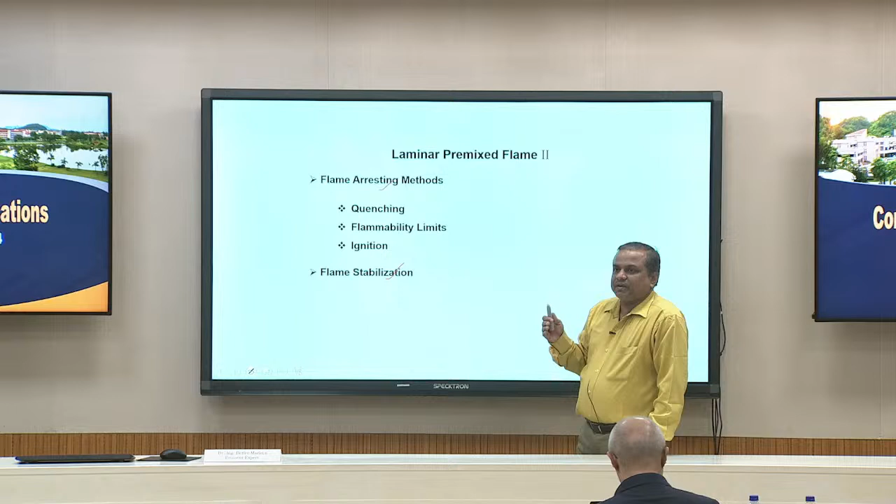In our previous lecture, we emphasized that for a sustainable laminar flame, we need favorable pressure and temperature conditions so that continuous combustion is possible. We demonstrated this with respect to IC engine combustion for premixed air-fuel mixture, where for normal combustion we get a pressure trend as a function of time in a smooth manner. But when the favorable condition is not there, this is shown as pressure pulses, sudden oscillations when the peak pressure is reached.

This says that the flame is already at elevated pressure and temperature and has sufficient strength, and it provides knocking.

At the same time, if you want to bring this situation back, we need other methods to avoid this knock through certain mechanisms in which flame can be arrested. Of course, this flame arresting is not a typical phenomenon for engines,

but this arresting method is very much required when you use laminar flame for certain applications such as burners, cooking burners. This arresting method is required so that the flame should not travel back or create a flashback, for which we require to arrest the flame. In other words, we must reduce its momentum to move backward. So that is one aspect we also require.

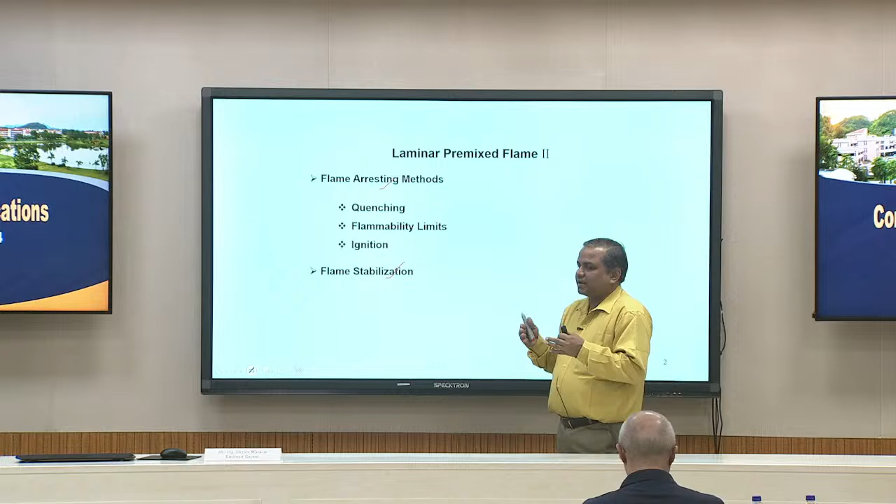Second aspect is that for cooking type burner applications, we require a continuous stabilized flame. As long as we are supplying air and fuel mixture with appropriate compositions, we must get the flame. And the flame should sit on the burner surface - it should not blow off, meaning it should not go above the burner, but at the same time it should not create any flashback. So that condition we call flame stabilization.

So there are certain techniques this flame arresting method is dependent on. First method is that we should know what are the different criteria in which we generate the flame. In the SI engine case, the flame is propagating and you need to arrest it. So the arresting of the flame depends on the area in which this flame is moving.

Second method is that we can control flame propagation by changing the composition of the unburned fuel-air mixture. We can talk about this in the form of flammability limit. The first one we can talk about in terms of geometry in which the flame is propagating, which can be quantified by quenching distance.

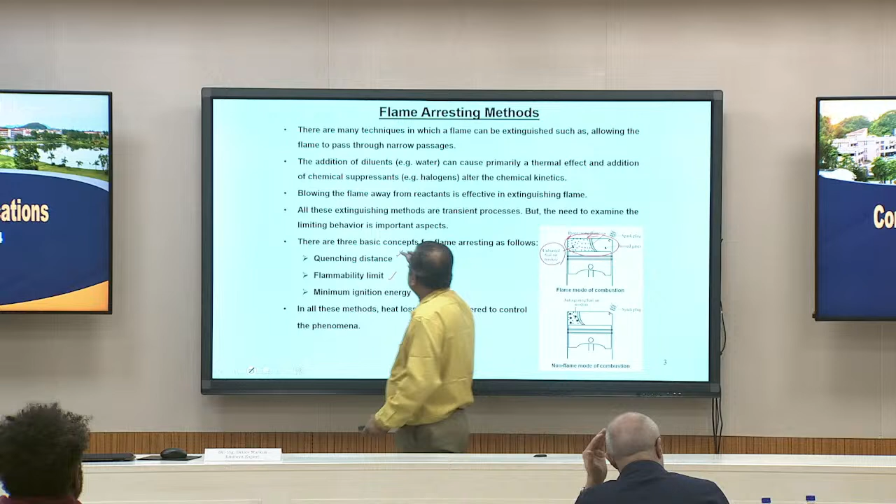So these are some of the methods we can think of. Second, in a classical way, we try to extinguish the flame. The extinguish method is simply dumping or cooling the flame through water - when fire is burning we dump water so it gets extinguished. In some cases we have fire extinguishers that can stop flame propagation.

This means diluents such as water, chemical compositions, or fire extinguishers in the form of halogens can alter the chemical kinetics. So basically, in totality, the flame has to be extinguished under certain situations so that it cannot create explosions.

In a layman sense, we can say by creating these concepts we are altering the chemical kinetics of the flame. So, these are the three basic methods which we are going to discuss.

So first, let's talk about a term called quenching. This quenching term depends on a parameter called quenching distance.

This quenching distance is determined by observing the flame passing through a tube, so that it does not flash back for a particular tube diameter. This means looking at a flame passing between two parallel walls separated by a distance d, and observing the flame in this domain.

So what you can see: there are two walls here, and we can imagine there is a flame moving up. This dotted line shows a kind of wall in the vicinity of the flame, which we call an adiabatic wall, and this slot has total energy entirely stored in the flame as it moves up. So when it is going up, it is trying to bring the charge into it and get it combusted, so that it moves slowly.

So there are two parameters here. One is called delta, and the other is the parallel wall distance in which the flame is moving. So there is a correlation between this delta and D.

So once you put this minimum ignition energy, the heat liberated by these chemical reactions must be equal to the heat loss from this slab by thermal conduction. So basically, the heat generated is getting taken out by the slab in which it is moving, that is, the wall.

When you imagine this type of flame propagating in a combustion chamber in engines, the chamber gets heated and requires cooling. So in this perspective, the heat generated is getting consumed. Now if it has to be consumed, that means if it does not, the strength goes up, and if it does not get consumed it will create a flashback.

So in this philosophy, there are two parameters taken into account. One is a flame which has entered a slot separated by a distance d, and we can define an adiabatic flame thickness delta.

Adiabatic flame thickness delta means the flame is not getting cooled, and the entire energy is sitting within a certain vicinity of this wall, within some vicinity of this thickness, and that thickness is very short, called the flame thickness. At this point, the flame has its maximum strength of heat within that volume, and this has to be distinguished or extinguished.

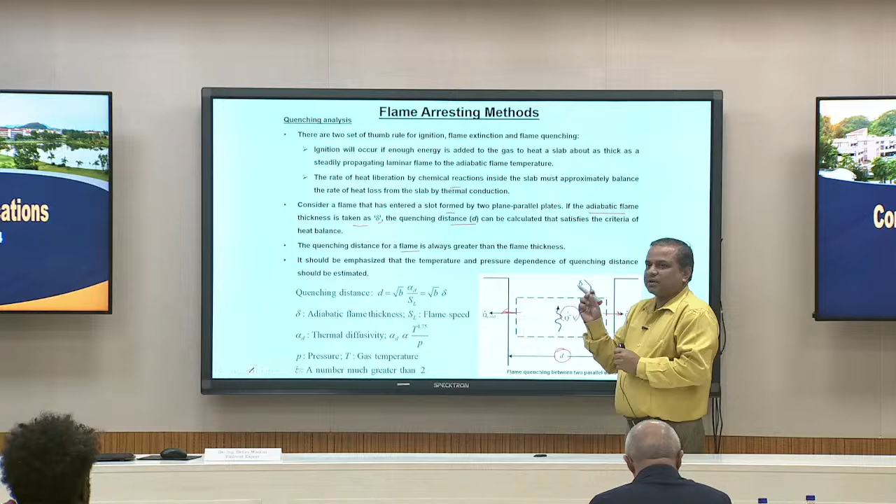That means this distance should not be so small with respect to the flame thickness; it should be higher than that. And this flame quenching distance is also dependent on other parameters like pressure and temperature.

Over the years, things are modeled to find suitable correlations between this quenching distance d and the adiabatic flame thickness delta. And here we define two parameters: one is delta, the other is b, which stands for the square root of b, and we have the square root of b into delta.

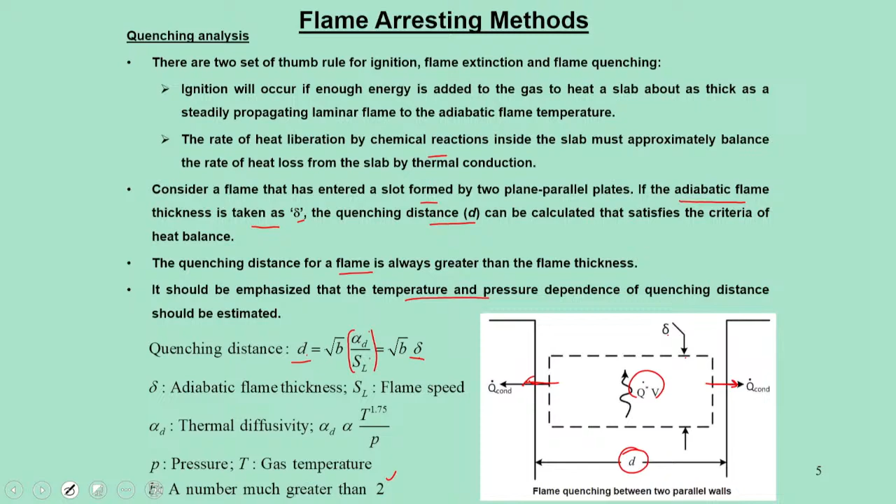Delta is equal to the ratio between the thermal diffusivity and the flame speed. B is just a number, used to make a correlation such that the quenching distance and delta get adjusted among themselves. Further, this thermal diffusivity is dependent on pressure and temperature parameters, and it is proportional to T to the power 1.75 divided by P.

The next point we talk about in terms of flame arresting method is the flammability limit. For every fuel there are two limits within which we can initiate combustion.

You must have known that for IC engine operations, we define this in terms of equivalence ratio. That means the engine normally operates in the equivalence ratio between 0.8 to 1.2, that is the part which is effective from the engine point of view.

But with respect to the fuel point of view, it is also possible to initiate combustion at a much lower equivalence ratio, less than 0.8, and it can also go above 1.2. What we are looking at are the flammability limits, the minimum limit for the lean mixture and the maximum limit for the rich mixture.

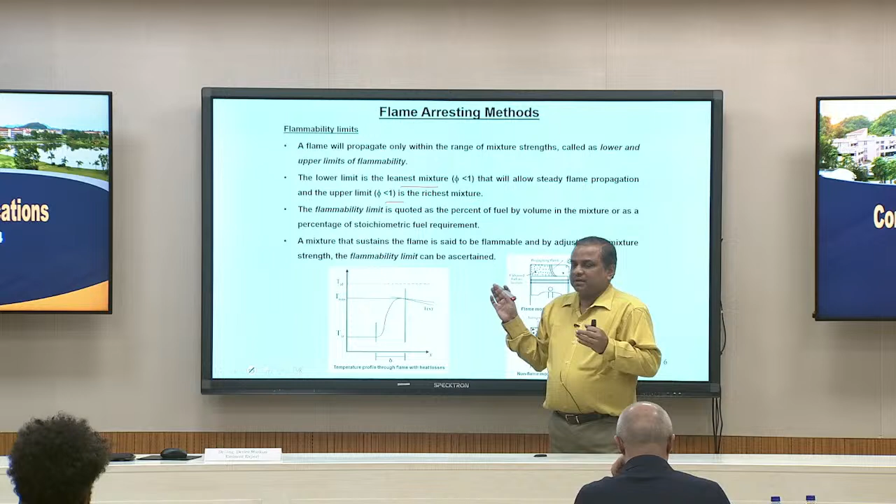We say that above this mixture we cannot make it too fuel rich, so combustion cannot be initiated, and we cannot have a mixture too lean for which combustion cannot be initiated. So that is the limit we call the flammability limit.

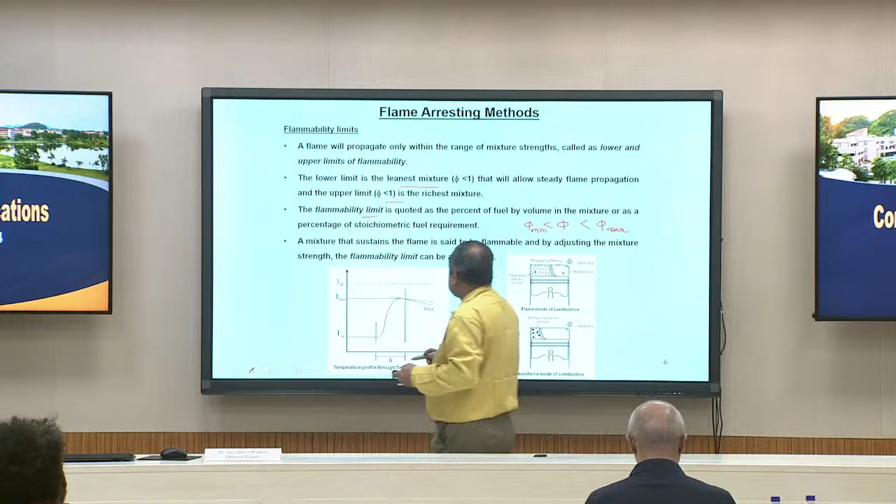This particular curve talks about the flame temperature as a function of x, and we are also looking at delta, the flame thickness. Here, when combustion is initiated, temperature shoots up suddenly to a maximum value, and in this impulsive nature of temperature rise, we define the adiabatic flame thickness, where the temperature reaches a maximum.

However, we can have an adiabatic flame temperature which is much above that. When we talk about the flammability limit, we have to say that somewhere we are operating at phi, with phi minimum on this side and phi maximum on that side.

Another important point to notice is that there is an instantaneous axial temperature rise along the centerline of the tube. There could be possible conduction losses along the wall, and many times the cooling effect of the product gases creates an adverse situation.

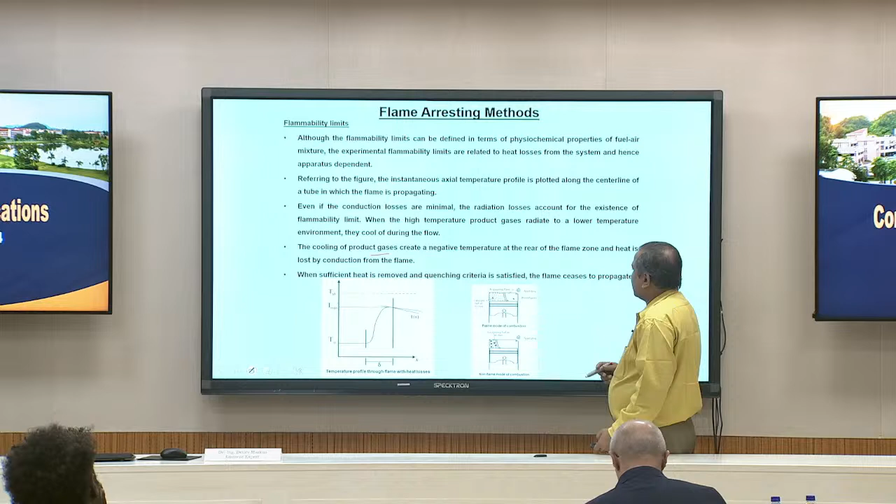Now, when sufficient heat is removed and the quenching criteria is satisfied, the flame does not move further, so the flame stops there. That means the flame is sufficiently cooled - in other words, we say we have arrested the flame.

The next category of analysis for flame arresting method is ignition. Ignition normally happens using a spark plug. The spark plug has certain dimensions, certain size or diameter, and during spark ignition what happens is we are creating a kind of...

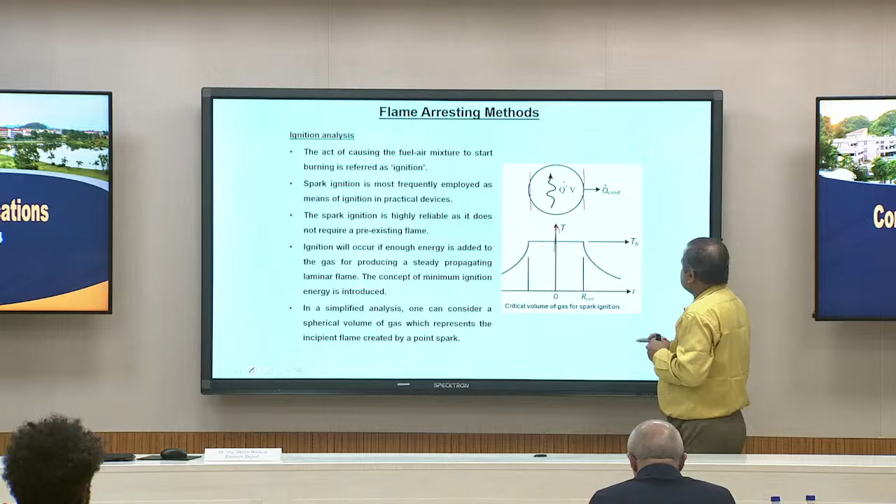One simplest way we can create is a spherical flame. We are dumping energy through the spark plug, which has some diameter, and through this spark plug whatever maximum size we can create - a spherical flame based on its critical radius - that is the maximum diameter of the spherical flame this spark plug can create. This is called the critical radius of the plug, or from the flame point of view, the maximum diameter of that spherical flame.

There are some correlations that help us find the critical radius of this gas volume. This is modeled in terms of spherical flame, and it depends on what we want to know: the minimum ignition energy required by the plug. To get this, we require the information about this critical radius for the gas volume, and this correlation says that the critical radius is square root of 6 into alpha D by SL.

Here, alpha D depends on many parameters, including the pressure parameter. This SL depends on the ratio of unburned gas mixture and burnt gas mixture. We have other terms which can be interpreted in terms of flame thickness, because alpha D by SL is delta. Through this we can find the critical radius for a gas volume as a flame thickness of this spherical layer of gas.

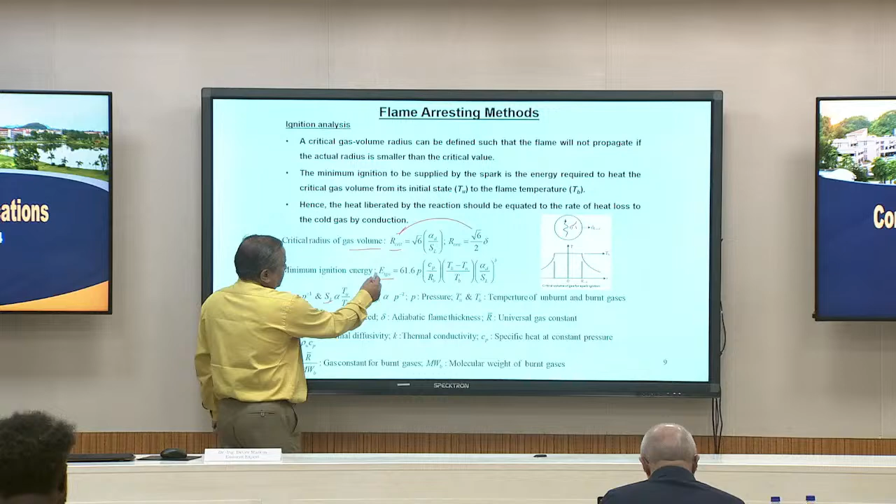Then we need to find the relation through which we can determine how much minimum ignition energy is required for a self sustained moving flame. That depends on pressure, thermal diffusivity, flame speed, temperature ratios and so on. Here RB stands as the gas constant. This is one parameter like Cp by Rb, where Cp is the specific heat at constant pressure and Rb is the gas constant for the burnt gas. This is calculated through ideal gas relations.

Next we need to talk about this ignition analysis. As already mentioned, the effect of pressure on the minimum ignition energy is the result of direct influence and indirect influence in terms of thermal diffusivity and flame speed. So we can say this minimum ignition energy is inversely related to the square of pressure.

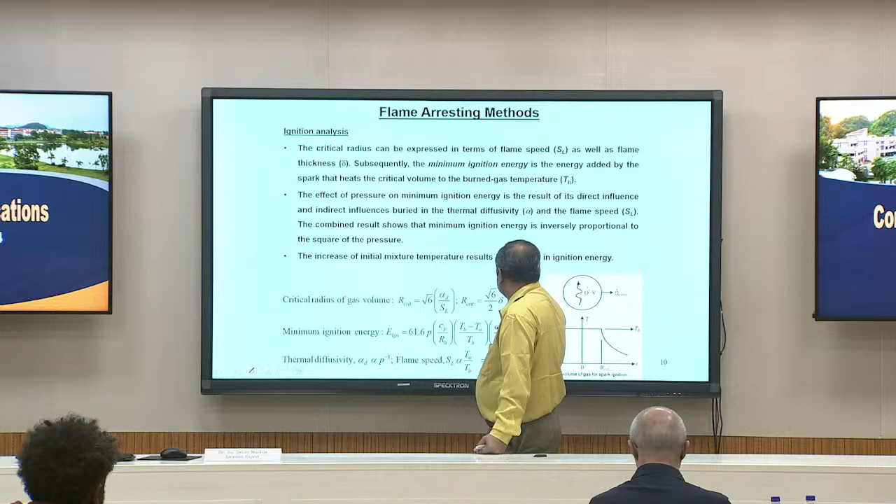If you see here, minimum ignition energy is a function of pressure, but pressure is implicitly involved in the calculation of flame speed. How? Because flame speed is a function of Tu by Tb, which means it also boils down to ignition energy being inversely related to pressure.

Then we move on to the next segment, called flame stabilization. In most combustion analysis, particularly cooking stoves and similar applications, we require a self sustained flame to remain, so that the flame is sitting on the burner face. There are two phenomena that can occur if the flame is not stabilized: first is called flashback, second is flame lift off. These are the two critical aspects for flat burners or cooking burners.

Flashback can occur when the flame enters and propagates through the burner without quenching. That means the flame does not see sufficient pressure difference to move forward, so it travels backward. While traveling backward, it sees that it does not have a sufficient slot diameter, and it follows through that slot in an effective manner. Through this we get a flashback. For that reason, an appropriate quenching distance is not maintained, and that condition is called flashback.

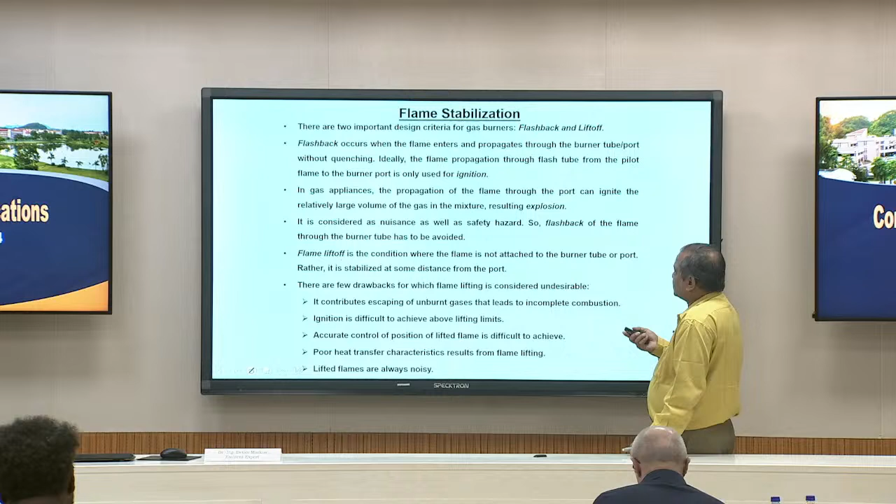However, this lift off condition has to be avoided, because that is not a case for flame stabilization. Why? Because this lift off situation allows the unburned gases to escape, meaning we are underutilizing our charge. Although the flame can lift up to a certain distance, if it goes above that it is difficult to create ignition. That means ignition is difficult to achieve above the lifting limit. Then accurate control of the position of a lifted flame is difficult to achieve. Through this lifted flame, we end up with poor heat transfer characteristics. And when we have lifted flames, they are always noisy.

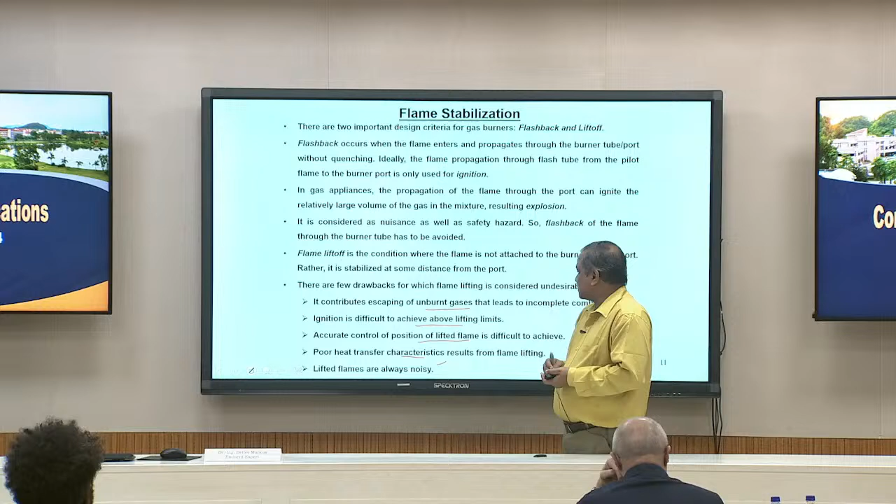In conventional cooking burners, you might have experienced these cases when the flame lifts off, or when we suddenly switch off the burner and an abrupt noise pops up, which means those cases are recalled as noisy situations.

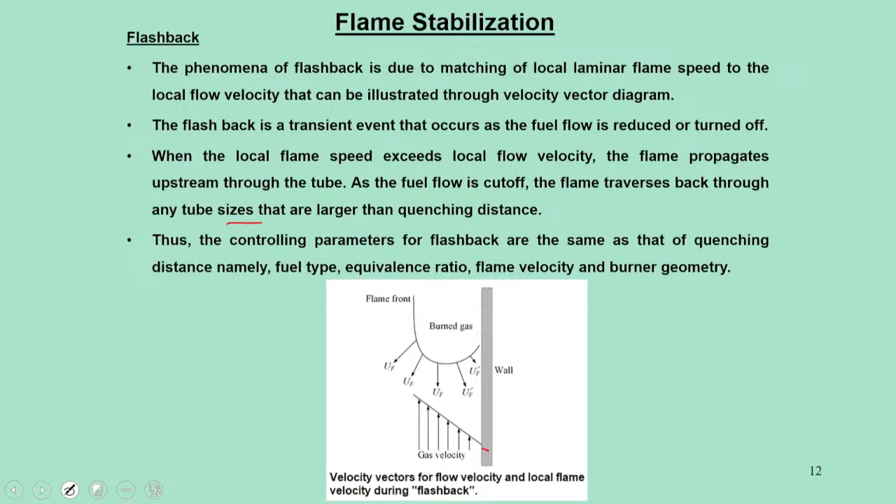It also depends on the tube size in which the flame is propagating. So the controlling parameters for flashback are the same as those for quenching distance, namely fuel type, equivalence ratio, flame velocity, burner geometry, and so on.

This is another figure which talks about a case study, just to give some trend comparing two types of fuels: one is a fossil fuel, methane, and the second is hydrogen. The basic difference between these two cases is that hydrogen has a large flammability limit, whereas methane has a smaller flammability limit. This means in terms of equivalence ratio, there is a large window in which we can create ignition for hydrogen, but a small window for methane in terms of phi, the equivalence ratio. Because of this, the flame speed in hydrogen is about 5 times faster than the flame speed of methane.

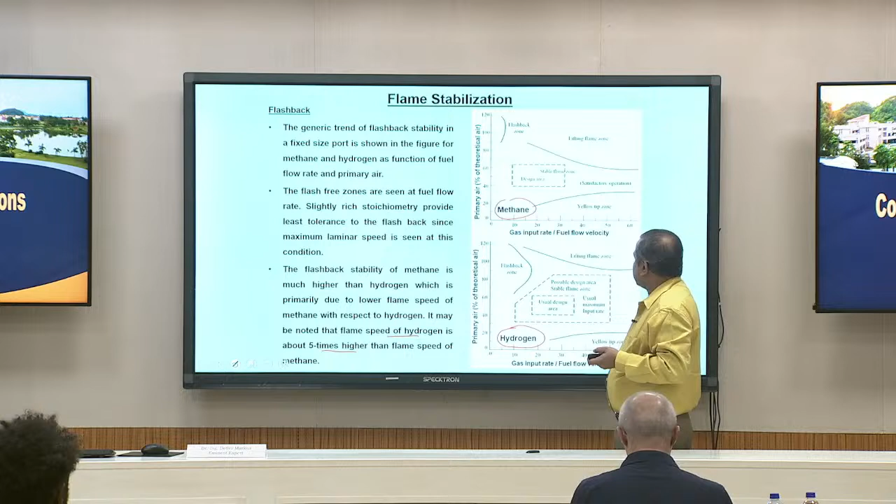So what this particular diagram shows is a generic plot, not in a quantitative manner. It talks about the gas input rate or fuel flow velocity with respect to primary air, and with respect to the percentage of theoretical air we consume.

If you look at the trends, for methane we have a flashback zone somewhere here, meaning for flashback to occur, our air requirement is very high, but fuel requirement is very low. That is the safe zone in which fossil fuels are operated, but that is not true for hydrogen, because the flashback zone can happen at any point with very small fuel flow input. At the same time, air requirement may be close to 60%, and air is anyway available for the charge. So a small quantity of fuel can lead to a flashback zone area. This is not possible when we use methane.

Now, when we say the flame is getting lifted from the burner surface, we can find a trace showing that if you keep increasing the gas input rate or fuel velocity rate, you will find that with increase in the fuel flow rate, the theoretical air requirement is less. This number is somewhere within 60%, whereas for hydrogen it is much higher.

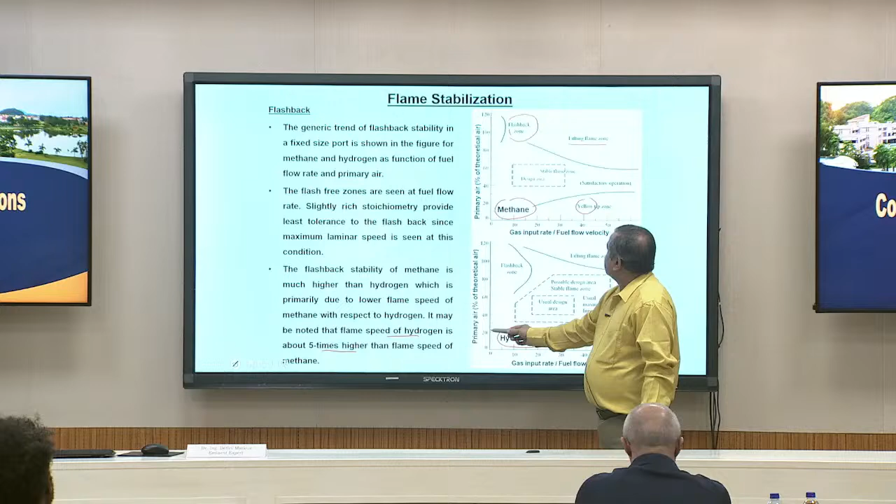Similarly, we have a lower regime in which the flame shows a different color, like yellow here and yellow here, and this is possible at 20% and also close to 40%. This gives us a domain in which we can design the geometrical area of the burner port. Here we have a large domain of design area for a stable flame, because that is what we require, and that is a standard domain. For hydrogen, we will also have a stable flame in a much larger domain than this.

That means for hydrogen the lifting zone requirement is higher, whereas for methane it is lower, which means we have flexibility of a larger burner area for hydrogen compared to fossil fuel or methane. So this is one kind of advantage, but the maximum possible area for hydrogen can be defined here, though there are detrimental effects if the flashback zone is taken into account.

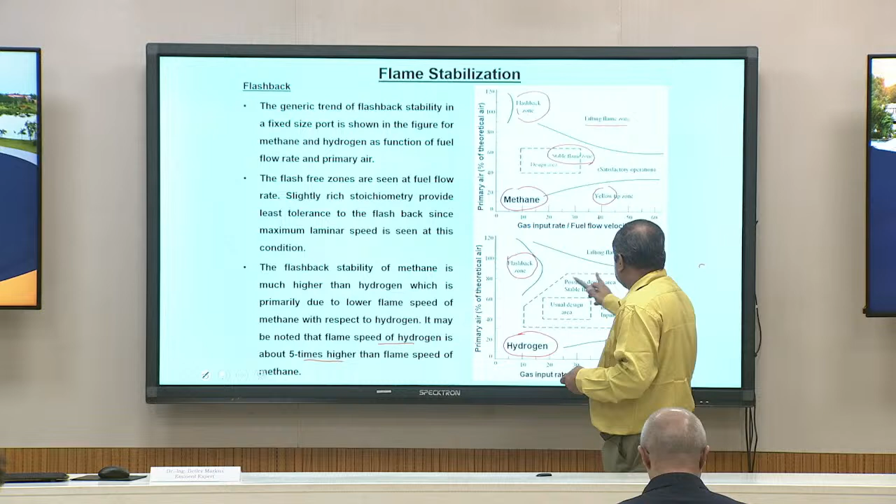In general, the basic summary is that whatever size or design area you choose for a stable flame, either for methane or hydrogen, the main intention is that it should have a flashback-free zone during its operation. That is the requirement for a stable flame.

Another situation I have emphasized is that the flame tends to lift up. It gets lifted up because the flame does not get enough oxygen from the charge, and it gets oxygen from the diffusing air outside the zone, which is the atmosphere. Assume we have the burner face and the flame gets lifted up, so there is a stand-off distance between them, through which atmospheric air runs in and oxygen gets filled up.

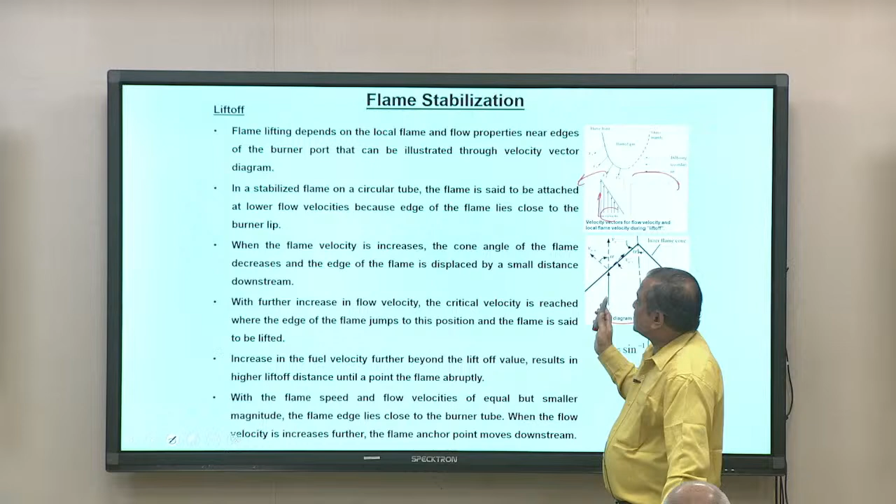So the flame front gets enough oxygen to lift further, but while lifting further, at the same time the gas velocity is coming up, so they either try to diffuse or interact. If the flame front lifts beyond a certain limit, the input charge can diffuse outside without getting ignited, because the flame front has already traveled further and the energy is no longer in the vicinity of the surface. In terms of the velocity diagram of laminar flame, alpha changes, so alpha no longer satisfies the condition between unburnt gas velocity Vu and the laminar flame velocity SL. They do not match, which means the flame gets lifted up.

So there is a critical velocity at which the flame gets lifted up, and when it crosses this critical velocity, we get a higher vertical flame lift-up distance, with the flame sitting above the burner surface.

This I have already explained, but I need to emphasize the phenomena of lift-up versus blow-off. Lift-up means the flame is getting lifted from the burner and sitting somewhere above it.

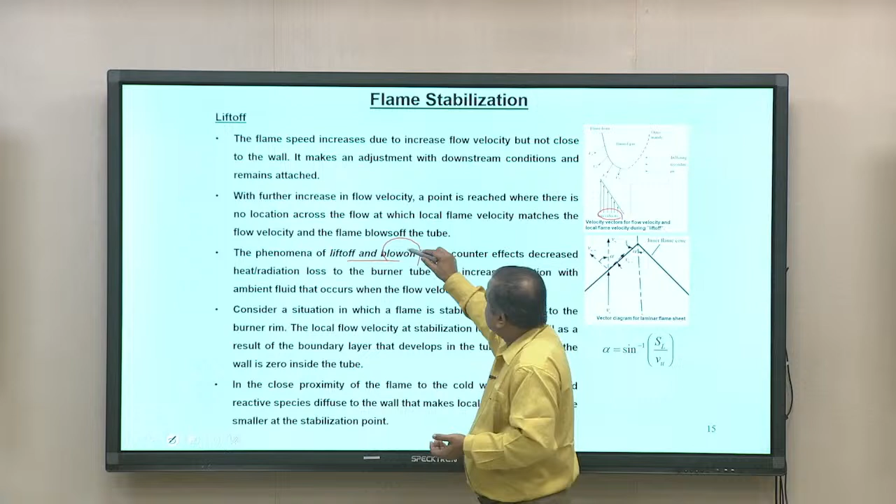There is a situation called blowoff. Blowoff means that at one particular time, the gas velocity does not see the flame in its vicinity, meaning the input charge velocity does not see it and so it cannot be ignited. When it does not get ignited but has sufficient momentum, it can push the flame, but it cannot ignite on its own. That way we say the flame blowoff condition is achieved.

Now, from a heat transfer point of view, we say this is a counter effect due to heat or radiation loss to the burner tube. So this view analyzes the heat or radiation loss.

Ultimately this leads to the conclusion that for methane and hydrogen, the liftoff operation of the flame varies as a function of primary air flow velocity, and the methane flame is more prone to lifting compared to hydrogen. That is also true because hydrogen has a very high, wide range of flammability limit, and of course hydrogen has a higher flame speed.

So this is all I need to discuss with respect to the laminar flame analysis. At the end of this lecture I will emphasize some numerical problems highlighting a flat flame sitting on a burner, which we need to calculate, and one case study done for a methane-air mixture, with the condition that the burner operates at 310 Kelvin and 6 atmosphere.

We need to find the condition for flashback and the mixture mass flow rate, meaning we need to design this burner. When designing it, we are trying to find the burner size and so on. First we need to find, for the methane-air mixture, the mass fraction of air and the mass fraction of fuel, and also the density of the unburnt gas mixture to obtain the mass flux.

Using these equations, either the dependence of flame speed as a function of pressure can be used, and from this one can find these things one by one: first the mass flux, second how we can find the diameter ratio, which addresses the conditions for a non-lifting case, and other cases such as when the flame has to sit on the burner surface, and what is the maximum distance it can sit at.

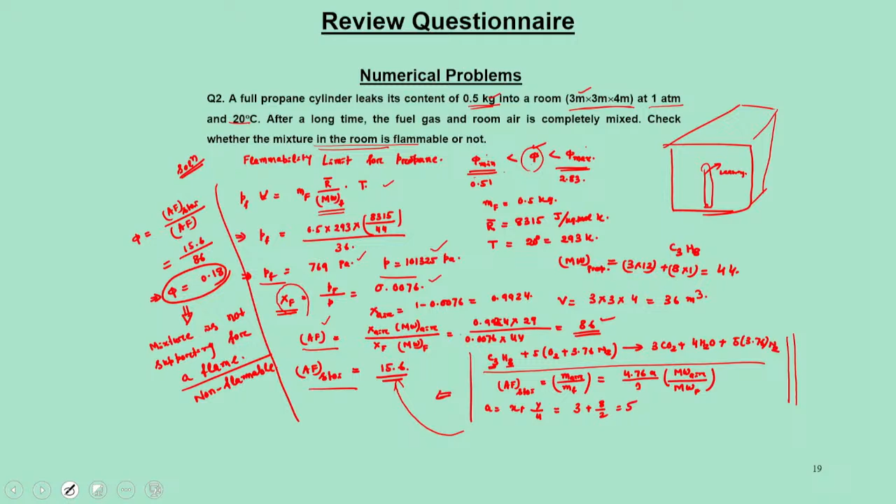From this we can find out what is the equivalence ratio for this fuel which is getting leaked. This mixture, when it is leaking, is mixing with air, and in that case the equivalence ratio is 0.18.

Then you have to cross check whether it falls in that flammability limit or not. In this particular case the mixture does not support the flame, so this leaking cannot initiate a flame. When it cannot initiate a flame, we can say it is not a detrimental or adverse effect, and it does not lead to any kind of explosion.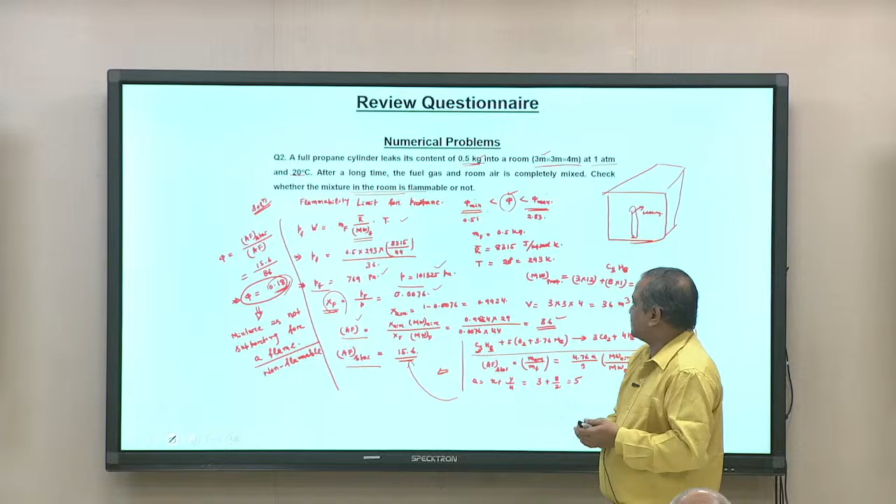Sometimes also in our conventional cooking burners, we feel there is a leak through smelling, but that leak does not lead to explosion because it is in a very low flammability limit. When it crosses this and comes to the higher flammability limit, it can create some adverse situations. So this is all I need to discuss for today.

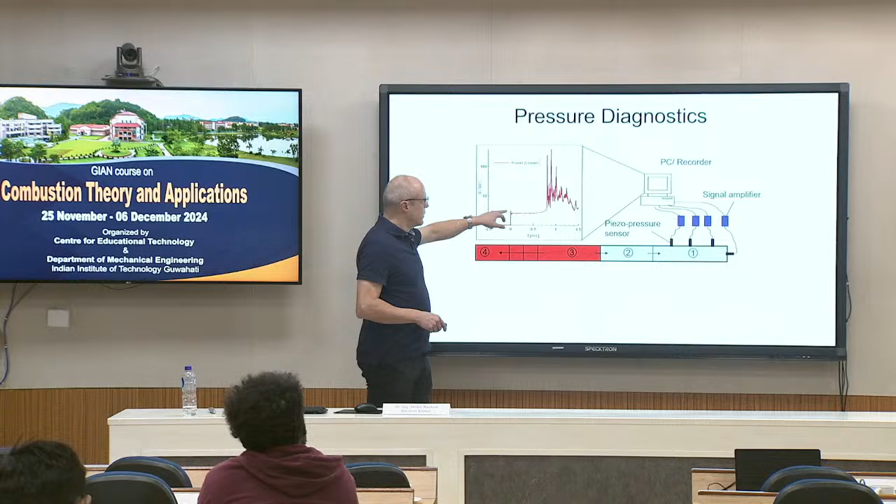We have seen this yesterday already in a shock tube. You can of course use a pressure sensor to examine the process and get your specific signals. If you use several pressure sensors along the pipe, you can measure velocity, and at the end wall, for example, when you reach the T5 zone, after a given delay time, you can measure the ignition delay time.

This we can support with emission spectroscopy if we have a proper window applied to our investigation volume. So here we have the emission of OH star, for example, which is then detected by a photomultiplier and stored by a PC recorder. The emission also gives us information about the ignition delay time, which is often a better variable to examine your results with numerical calculations.

So hopefully today this video will work. So we can perform Schlieren measurements. So you see... we don't see. I'm sorry, I've tried it on my computer. I have reintegrated the video. Okay, we can live without it.

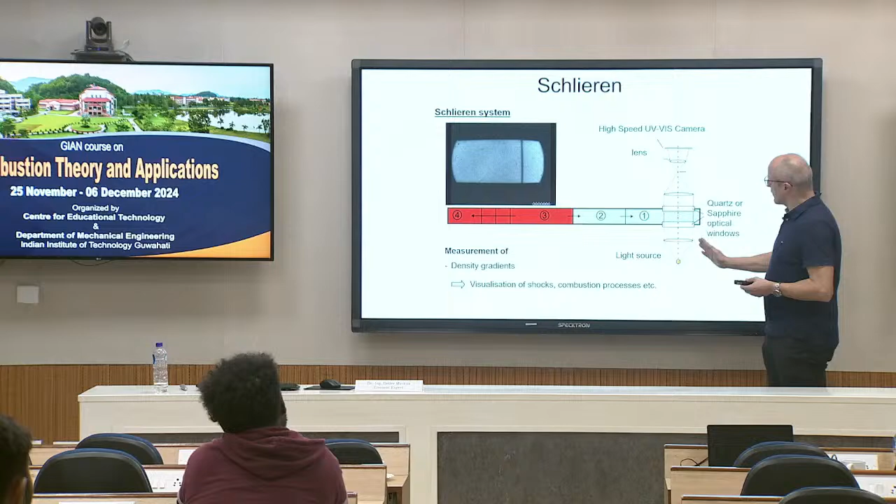What we have here is a typical setup: a light source, a typical lens, and then another lens to collect the light. Here we have a knife edge, for example. The idea is, if the light is not disturbed, we won't see any influence. But if we have hotter or colder zones, our light is deflected, so it's no longer in line, and some part of the light moves to the side and is cut out with our knife edge. So in our image we would see a darker area, or the other way around, if it moves the other way, we would see a brighter area.

So we see density gradients and can visualize shocks and combustion processes this way. It's also possible to perform quantitative Schlieren measurements, so if you do it very precisely, you can also get information about the temperature field.

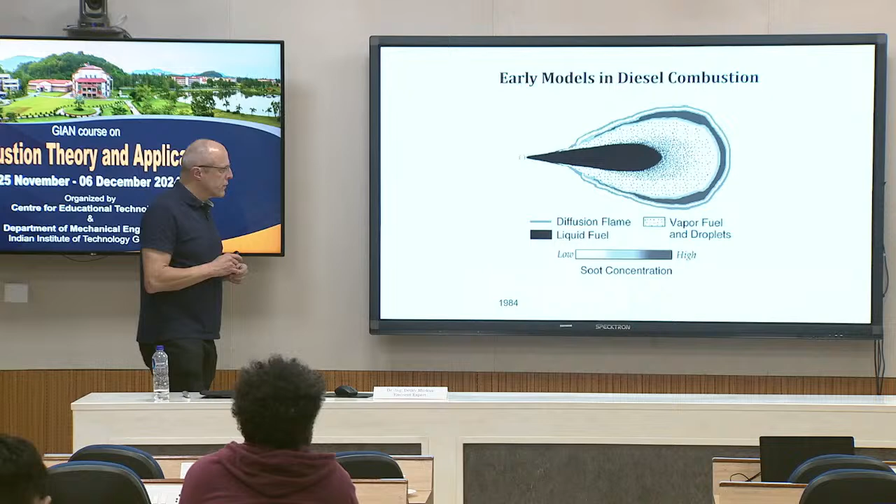Here's an example: an early model for diesel combustion. Until 1984, it was assumed we have a jet of liquid fuel, which vaporizes and atomizes, and then we have a diffusion flame in this area. So here we have the diesel, here the air, and the flame takes place in this area.

So then here we perform Schlieren measurements in an optical engine. We have one cylinder of an engine with optical access through a small window. At the bottom of the piston there is a mirror, another window here, so the light is transmitted to the outside again and collected with our camera here.

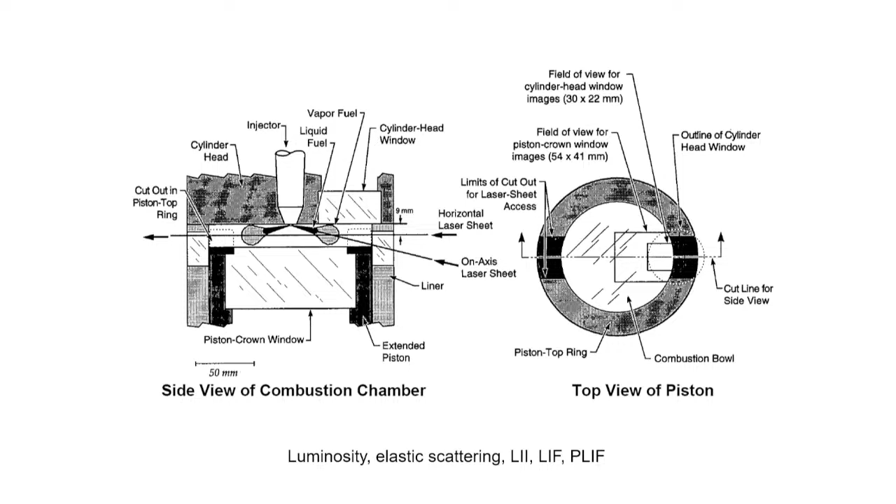Here you can see more in detail the setup. The light is following this path here, and so we have possibilities to examine our diesel process.

These techniques then have shown finally that the classical model was wrong. We don't have a classical diffusion flame outside; instead we have a fuel-rich premixed reaction zone, and combustion takes place more or less all over here. The NOx formation and the soot formation, soot oxidation zone are outside.

So what is the ideal solution? What would be the dream? It would be nice if we could measure the interesting species time resolved, including radicals, transient intermediates, and even isomers, and this should be done for all interesting pressures and temperatures.

So what can we do already? That's already a lot. Here you see a classical reaction pathway. On the left and on the right you see the soot formation process, starting with simple hydrocarbons plus oxygen.

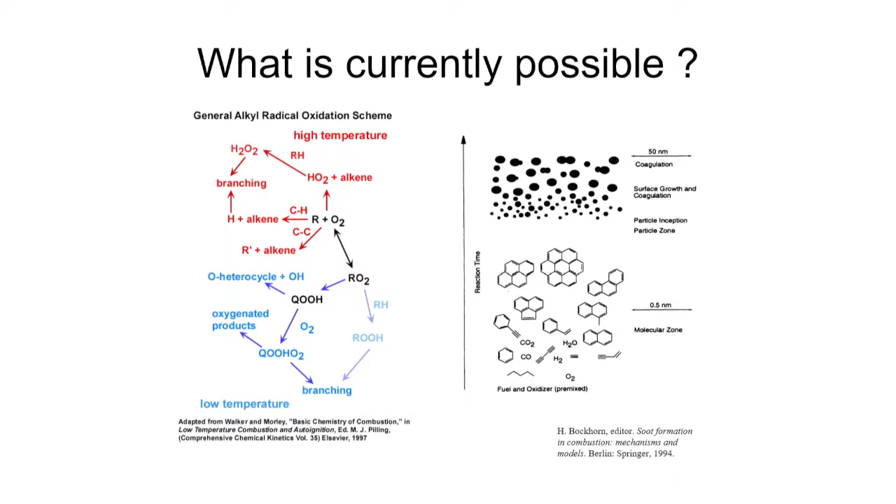So here we can use absorption, fluorescence, emission, phosphorescence, chemiluminescence, LIF (laser-induced fluorescence) to examine the molecular level. Then we can use LIF for the larger PAH, and finally we have LII, laser-induced incandescence.

And Mie scattering to examine the larger soot molecules. I will explain all the background here in the following slides. And here, of course, this we have already discussed. We have the possibility to examine our interesting molecules, HO2, H2O2, H, RH, OH, RO2. So we have specific tools here to examine the temporal evolution during elementary reactions, but also during the overall combustion process.

Of course, there are limitations. First of all, we need optical access. That's important. For example, consider Rayleigh scattering - the scattering of our laser light by the molecules in our volume. Rayleigh scattering means the detected wavelength is the same as the excitation wavelength. The idea is the detected scattered light comes only from the molecules along the pathway of the laser.

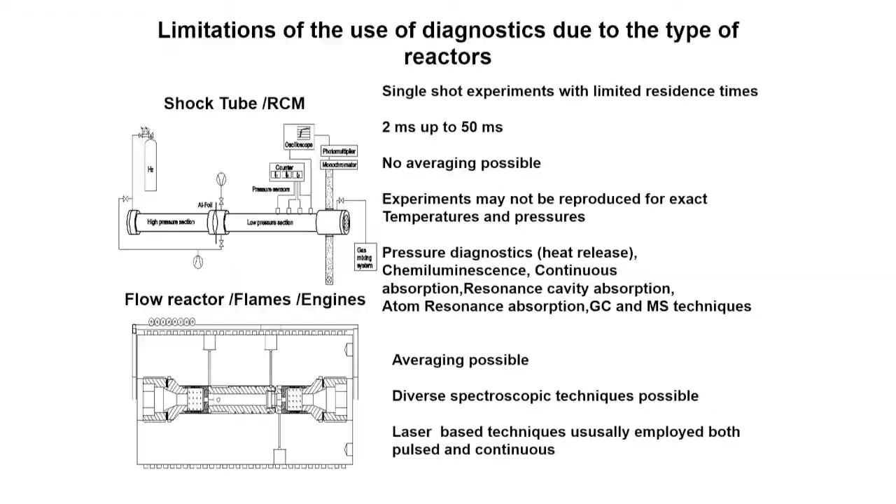So what we discussed yesterday with this shock tube - yes, we can have optical access here. We have quite long observation time, so 2 milliseconds up to 50 milliseconds. However, in this shock tube we have not the possibility of averaging. So we have one shot, and then after 30 minutes we can perform the next experiment.

And then, of course, the question of reproducibility. Even though it may be reproducible with one specific setup, if you then want to compare it with another setup in another lab, there may be deviations we have to consider. But then we can use the whole range of techniques here for this.

So we have discussed it shortly also for the flow reactor, where we have access, so we can use laser-based diagnostics also inside a flow reactor. Of course we have to adjust our setup to have access here, but it's very, very often possible, even though we have to use closed vessel systems.

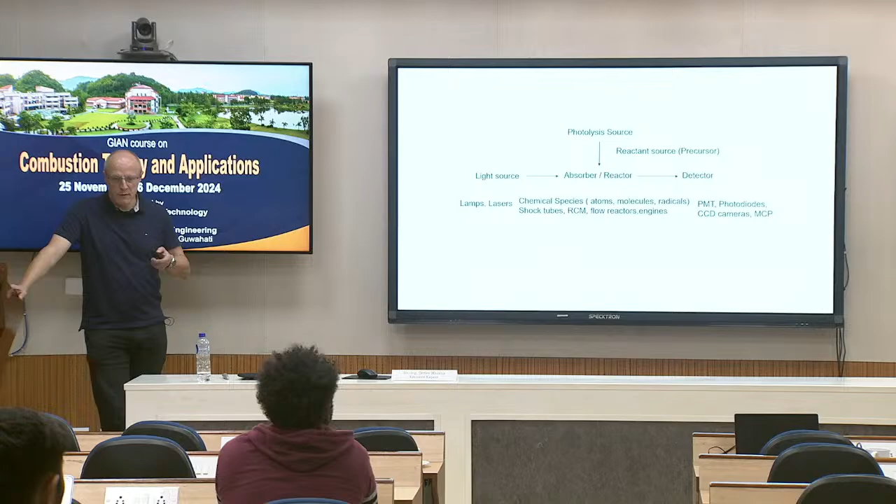So the need here is, of course, we need to have a reactor - our shock tube, RCM, flow reactor, engine, whatever. We need something we want to examine, and which we can examine using proper laser technique. LIF, for example, is only possible with selected species.

So OH and NO, nitric monoxide, can be used easily. CH is also possible, but if we want to use LIF for H and O atoms, it's getting more and more complicated - two-photon techniques have to be used. So we need, for the proper species, first of all a proper species, and then of course we need a proper light source.

Lasers are quite expensive. We are talking about several hundred thousand euros for a very sophisticated setup. So of course this is then the crucial part. You can do whatever you want, but you have to pay for it.

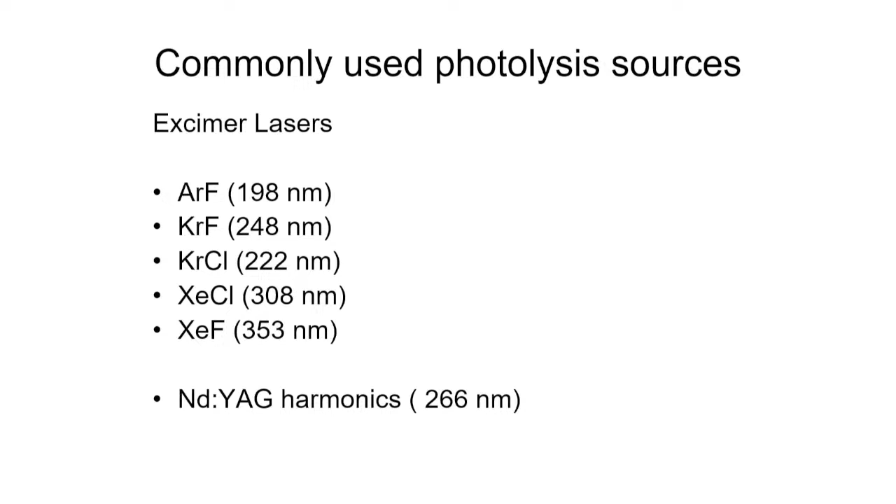So the classical photolysis sources are also lasers. The old-fashioned way is to use excimer lasers, but you have to get them, because most of the newer lasers are, for example, Nd:YAG lasers. But of course, you have to consider that you get the proper wavelength to initiate your reaction here.

So I will not go too much into details concerning spectroscopy, but at one or two positions we of course have to discuss it. So your molecule is normally in its ground state, at room temperature, 300 K. This electronic ground state is separated into different vibrational states, depending on the temperature. There is a Boltzmann distribution here, and then this vibrational state is, in the case of a molecule, also eventually separated into rotational states.

So you have a Boltzmann distribution of your molecules depending on the temperature you have, and then you can excite them with a laser. The energy difference is, of course, related to h times nu, the frequency of our laser. So you have to use a proper frequency to match it with the energy difference between the two levels you are interested in. So you excite your molecule to an excited state.

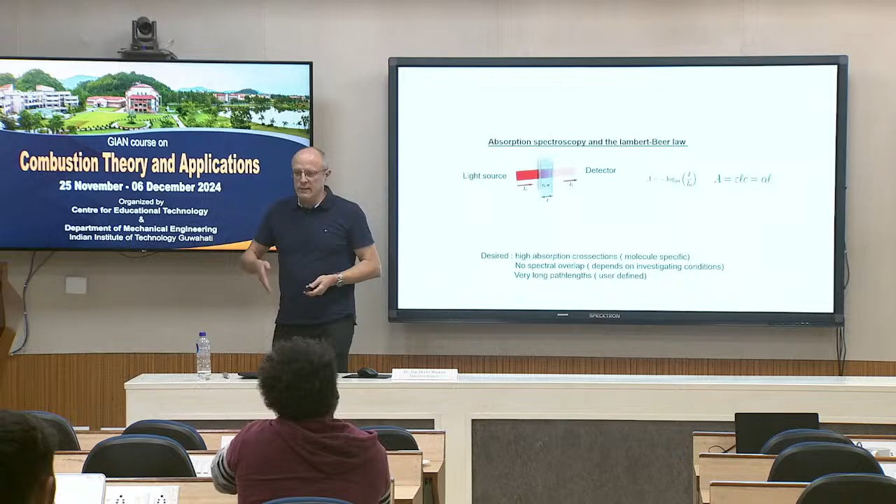Another principle is absorption spectroscopy, using the Lambert-Beer law. So we have a light source and send it to our detector, and the intensity of the light behind the detector depends on the length of the cell, the concentration inside the cell of our molecule of interest, and an extinction or absorption coefficient. So what we see, if we use proper wavelengths, the light is absorbed depending on the concentration we have. This is then normally the quantity of interest.

A very sophisticated technique, but very commonly used in chemistry, is atomic resonance absorption spectroscopy. So here we are not talking about molecules, we are talking about absorption spectroscopy with atoms, and this we can use also with our classical shock tube.

Here we have a specific light source, a shutter, and then a solar blind photomultiplier at the end. So we send our light through this volume and probe for specific atoms, depending on the wavelengths we use. This can be used for a broad range of atoms.

It's based on some work from 1965 where they used a light source for H atoms, at 121 nanometers, in the far UV region. It's very highly selective due to very high absorption cross section, so you really need only a very small amount of H atoms to detect them - 5 times 10 to the power of minus 13 mole per cubic centimeter. This is a very low number.

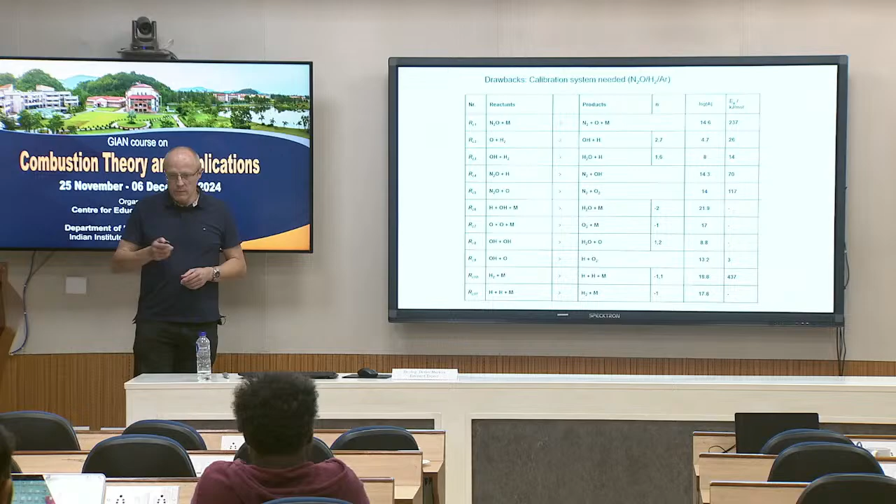We can examine or use it for a lot of reactions, but finally the drawback is we need a calibration. So we have a classical absorbance here as a function of time, but to go from the absorbance to a number of H atoms we need a calibration curve. Here we see the modeled H atom concentration via absorbance under similar conditions. This is always the crucial part - getting your concentration from the measurement - and this has to be done frequently.

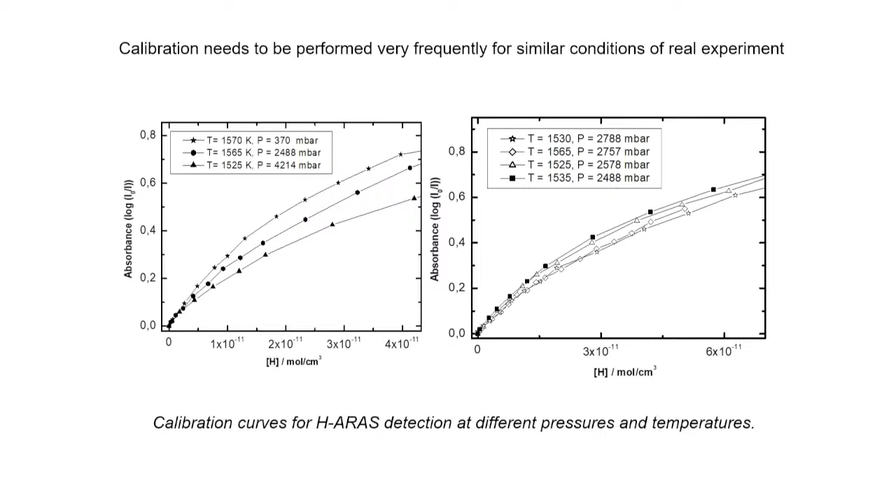If we have different pressures, for example, the absorbance is influenced too, so this has to be considered. Here we see the absorbance as a function of number of atoms. Some careful background work is necessary.

The advantage is we can produce atomic products quite easily. If we have a hydrocarbon and want to separate H, it's quite easy to perform. We can examine the consumption in bimolecular reactions. This reaction in detail I will explain later on, so we can use it for more complex reactions. One disadvantage is we need high purity, since everything produces H atoms, so we have to clean our reactor carefully. Shock tubes need to be very clean and highly electropolished, and we should use only very low concentrations, because the method is so sensitive.

But here an example: we have CH plus N2 gives HCN plus N. This is the reaction we want to examine here. You see we have a quite complex setup - a classical shock tube, driver part to driven part. We use a krypton fluoride laser to initiate the reaction and form our CH radical.

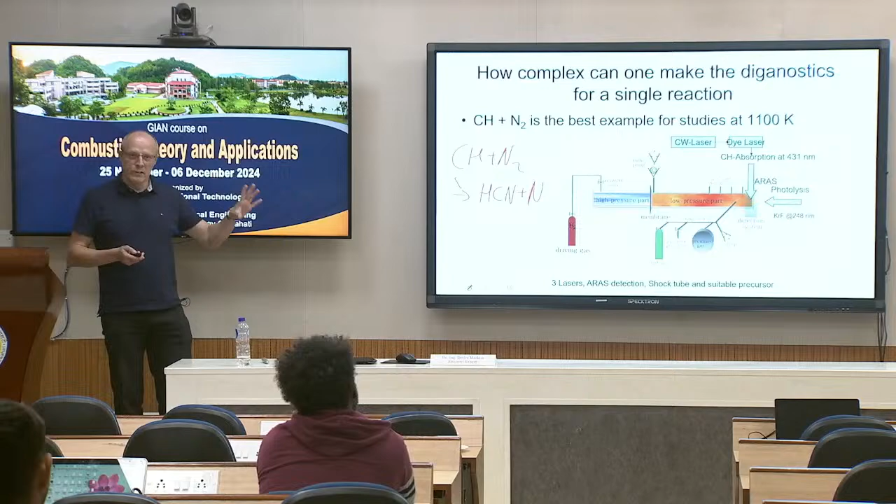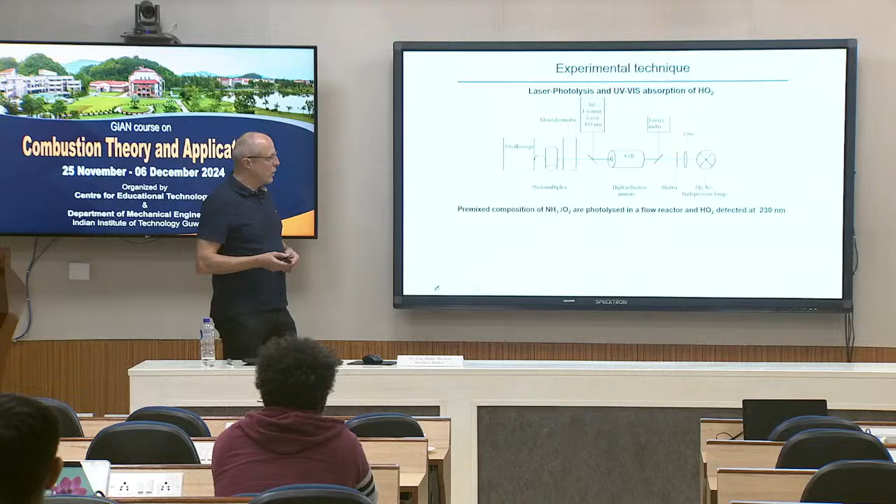So here we have a premixed NH3O2 mixture in our flow reactor, and finally we measure then the HO2 concentration to get some information about the reaction of interest. So, example here we have the HO2 as a function of time signal. We see that it increases when the flow enters our flow reactor, and so the reaction initiated, and finally a saturation level is reached here.

So of course this technique, which is quite simple, has disadvantages. First of all, many species can absorb light, can have an absorption cross section in the specific region. So the advantage is you can use it for every species, nearly every species. However, if you have several of them in your reactor, it's quite difficult to separate them, so the spectral overlap is the disadvantage.

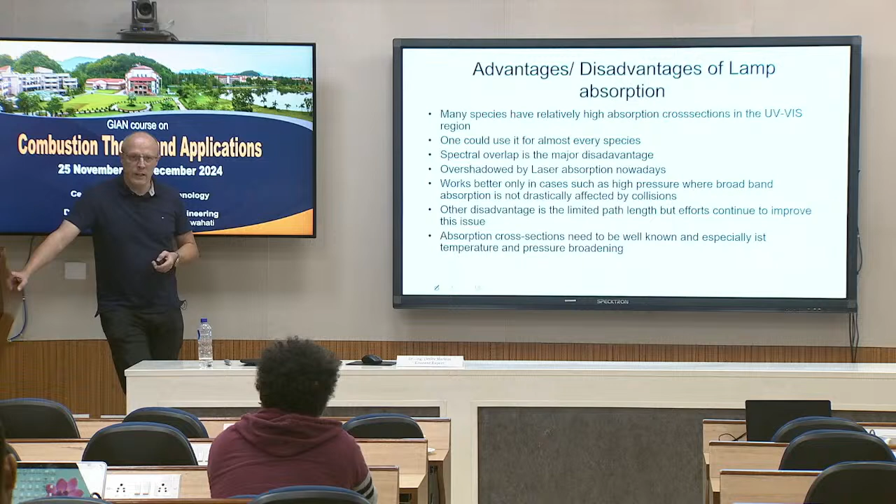And what we do today normally is the TD-LAS technique. So we have specific lasers we use, so we have only very small wavelengths which we send to our test vessel. So tunable diode lasers are used here. They are very cheap because they are used for telecommunication in our days, and the advantage is we can use it for a lot of different wavelengths. So we can use for each molecule one specific laser with a very narrow wavelength. So the spectral overlap problem can be avoided then, of course, because we can examine the absorption by different molecules within one experiment.

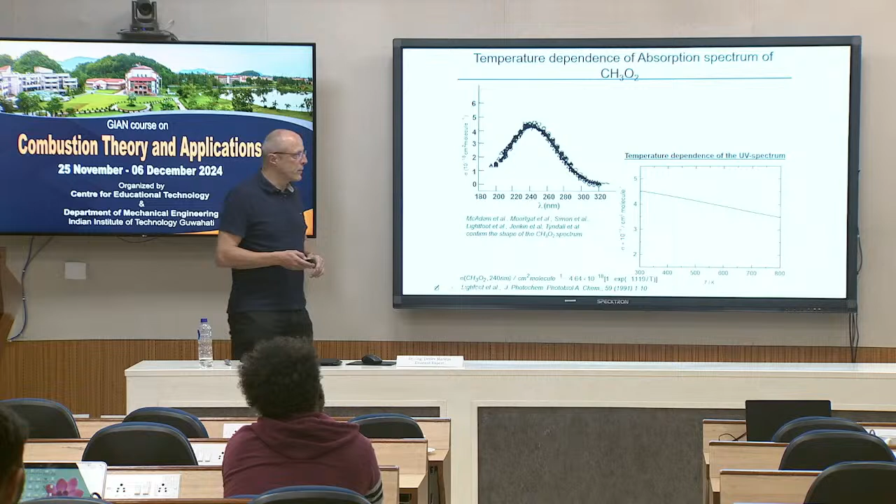So then, of course, you have to consider something like temperature dependency, pressure dependency. I said in the beginning, the absorption depends on the concentration of our molecule. But also this, of course, is then related to temperature and pressure. So here for this CH3O2 example, it's visible how the cross section decays with temperature. So you need to know precisely how this changes for a precise measurement.

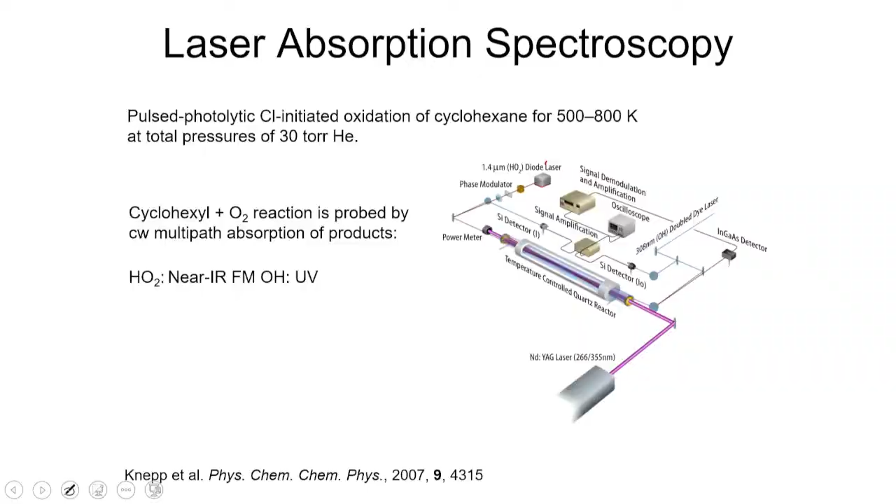So the idea is here: our light enters, and depending on the gas mixture inside the cavity, there has to be a molecule which can absorb this frequency. If it's there, you can see that the light hitting our detector decays as a function of time. So with each reflection, or after each reflection, the intensity decreases because it's absorbed, or some amount of the light is absorbed by the molecules.

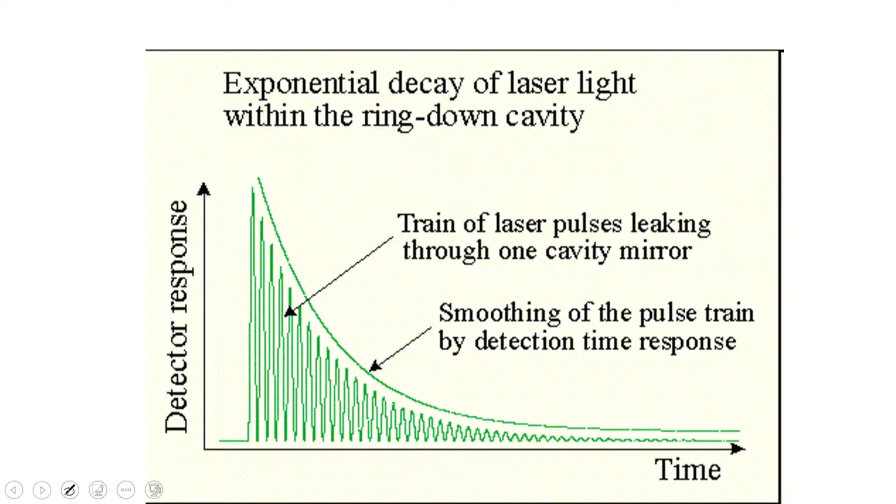So we get this graph finally, an exponential decay of our laser light, and we can use this technique to measure very, very small concentrations. So it's a very highly sensitive method.

It's not dependent on the initial laser intensity, so shot-to-shot variation concerning the energy of our laser has no influence here. So we can repeat the measurement quite often, maybe even after several milliseconds we can perform the next shot.

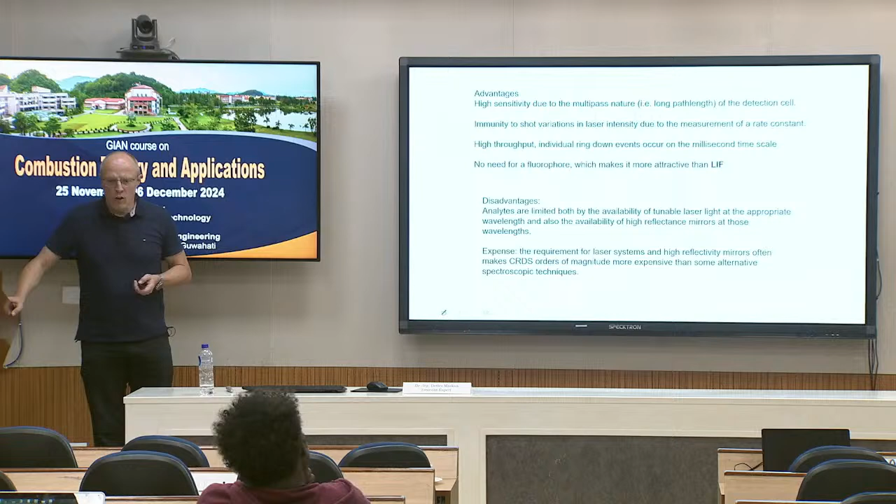So it has a lot of disadvantages. First of all we need a proper light source, a proper laser here. This is today no longer the big issue. We need proper mirrors here for this specific wavelength, but finally the main problem is it's quite expensive. We need a laser, and we need proper mirrors, which together is quite expensive compared to other techniques.

So laser-induced fluorescence, this is the typical workhorse for combustion experiments. Here we have a more simple setup. We have our ground level. Our molecules are normally here in this ground level of this electronic state, even at combustion conditions.

Depending on the temperature, they may be in different vibrational or rotational states, so we can use a classical Boltzmann distribution here to get information on how many OH atoms we assume in which energy level. Then we can use a laser with a proper frequency to excite molecules from the ground state to the upper state, where we have an energy transition.

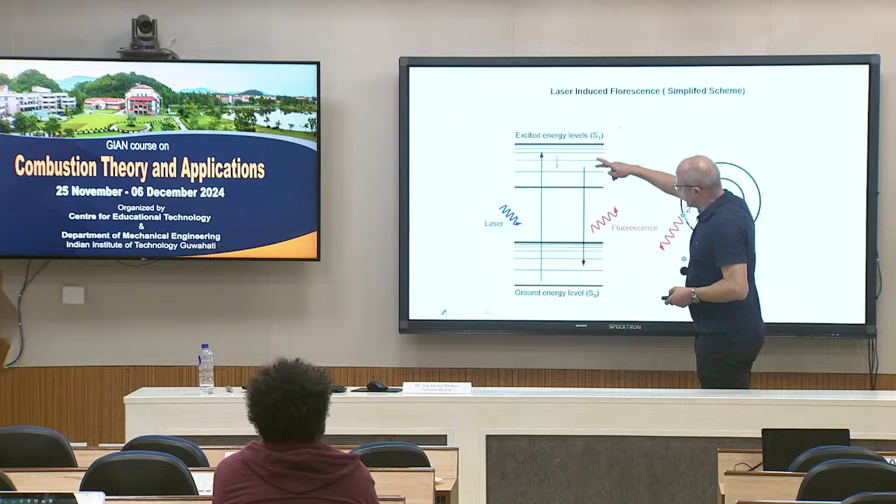Finally, after a specific time, this molecule falls down to the ground state and emits light with a frequency depending on the energy gap between the specific level here and the specific level there. So we excite an electron inside our molecule from one specific energy level to a higher energy level, and after a given time it falls down, and we can detect the fluorescence.

So again we have to take care: this is a very narrow band laser normally. We can also use broadband lasers, but normally this is a narrow band laser with one specific frequency. However, the emission spectra consist of a lot of lines or even bands.

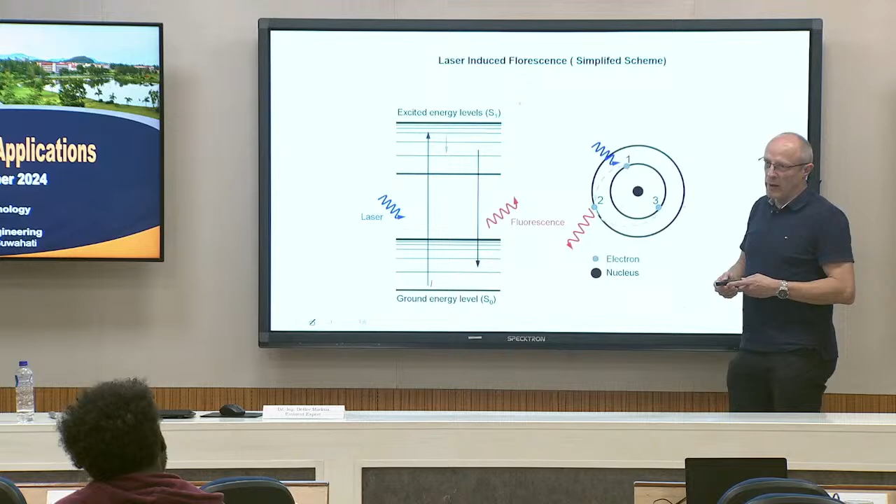So we have a broad detection region here, and it's quite difficult, for example, to perform quantitative analysis here due to the processes leading to the distribution of our molecules in the upper electronic state.

When we go a little bit more into details, here we see the electronic ground state with different vibrational levels, V equals 0, V equals 1, and inside these vibrational levels different rotational levels. The population depends on the Boltzmann distribution. We excite from one specific rotational level in one specific vibrational level in the electronic ground state to this upper electronic state, reaching one specific level, depending on the laser wavelength we use.

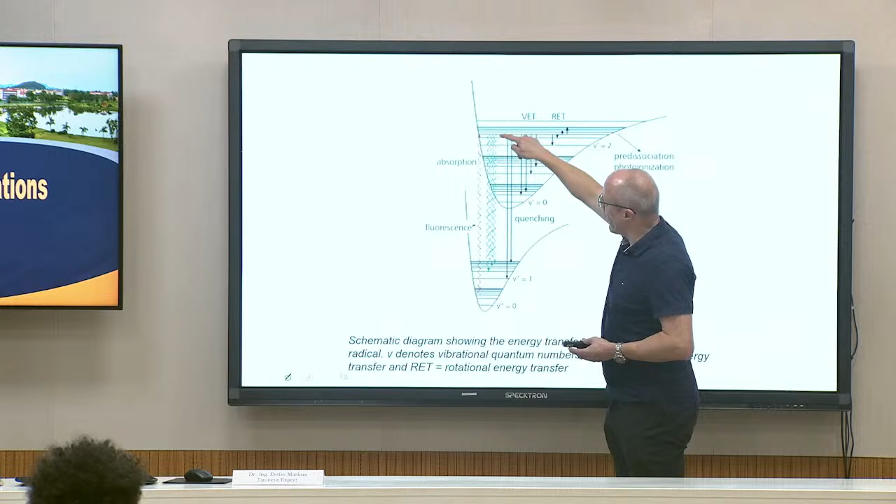But then, of course, we have a distribution here due to collision processes and other processes. We can have pre-dissociation and so on. It depends really on the system we examine, what is happening here in the upper level before finally the electron falls down. Even though they come from one level here, they can fall down into several levels, and this leads to different frequencies in our emission spectra, so it can be quite complex.

But we can use this technique, for example, here in our flow reactor. Again, we use a krypton fluoride laser to initiate the reaction of interest, and then we use a neodymium laser to examine OH. This is one specific transition we excite here to have access. That's the advantage.

Neodymium laser plus dye lasers are quite cheap, and this excitation wavelength is quite common in our days.

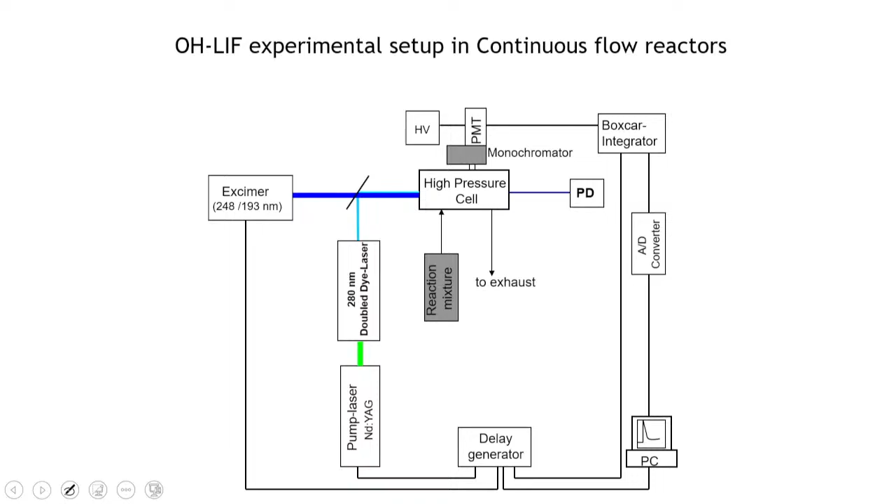So how does it look like? We have our high pressure cell. We use this excimer laser for excitation or initiation of the reaction. Here we have our YAG laser dye laser system to produce the light at 280 nanometers. We send this through our cell, and in this example we have a quite simple photomultiplier which then collects our fluorescence light, which is then selected 90 degrees, or perpendicular, to our laser beam.

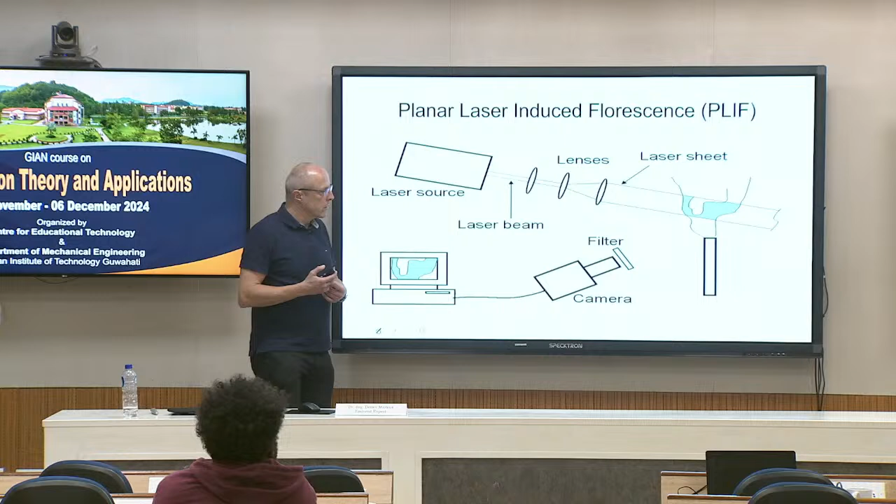So we have a laser source, and we use a laser system to produce a laser sheet. It has a given height up to several centimeters, but it's normally very small in thickness, in the range of 100-200 micrometers. We send this sheet to our probe volume, our flame, for example, our combustion cell, and then at 90 degrees, or in a specific angle to the laser, we have a camera where we detect the emitted fluorescence light. We normally use a filter to get rid of the scattered initial wavelength of the laser source. So finally we get information about the fluorescence as a function of the position inside a flame.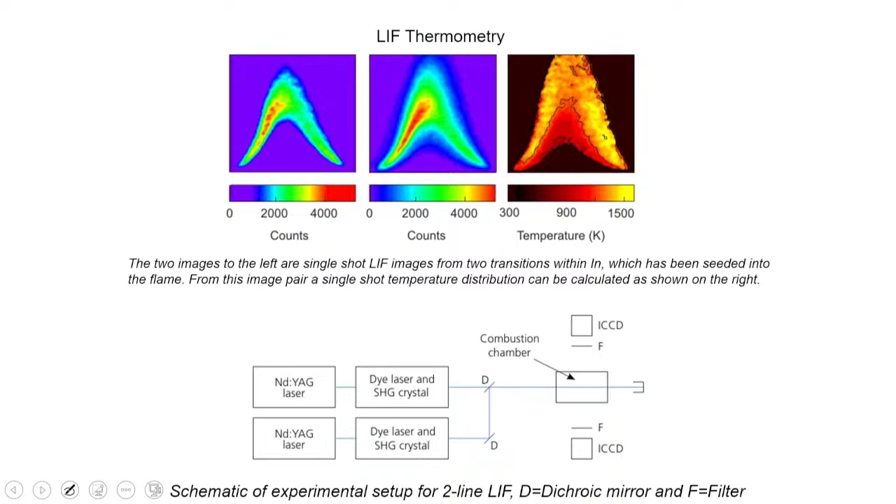We use two lasers with two specific wavelengths. We excite two selected ground states to two selected rotational levels in the lowest vibrational level, normally in the electronic ground state. And so we have a Boltzmann distribution, this we know. So if we know the initial temperature, or we want to know the temperature, when we measure the intensity at one specific wavelength and a second specific wavelength, we get information about the Boltzmann distribution in the ground state. And this finally gives us information about the temperature inside the molecule, or inside the combustion chamber.

But again, you see we need two laser systems, so two YAG lasers, two dye lasers, quite an expensive system, together with two ICCDs.

So then we can come to laser induced incandescence. This we use for examination of soot formation. So we have particles in our flame, for example, and we heat these particles up with a laser to a specific temperature. They start to glow, and this glow light then can be detected.

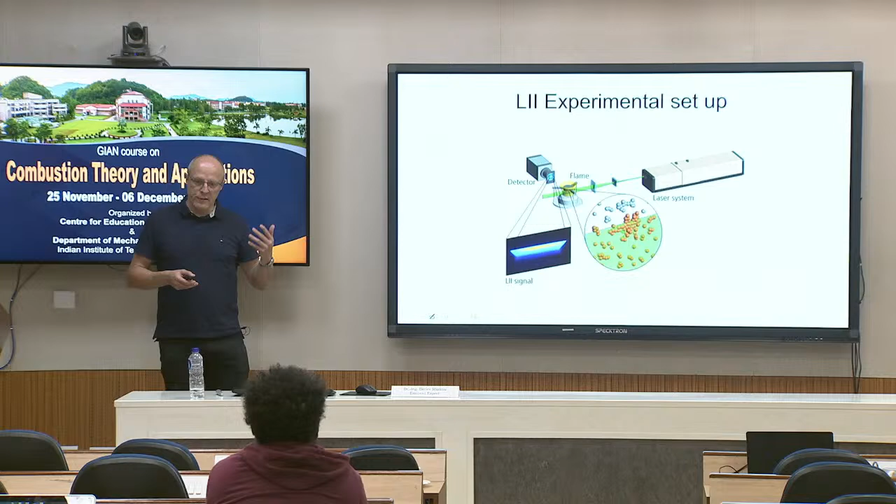We can yield several pieces of information about these particles from this emitted light. We can measure first of all soot volume fraction. We can get information about the particle size. We can perform planar measurements. We can perform temporally resolved measurements. Of course, there are limitations.

There should not be too much soot, otherwise we will face some problems. We need high power lasers, so quite expensive again. We need proper detectors with short gating time.

And of course, we have to consider, are there other excitations? For example, if we have a classical hydrocarbon flame, or here with precursors like benzene, there will also be broadband fluorescence. So in addition to the light from the incandescence, we also have fluorescence light, and we may use proper filters or a proper detection system to separate this. So the typical application is examination of soot growth and destruction in laminar flames, or soot emission, for example, from diesel engines.

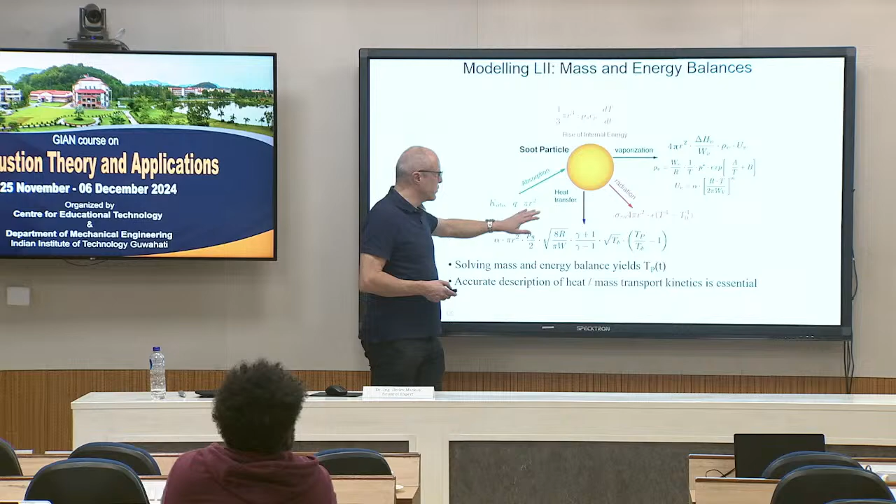But if we do it properly, we can calculate the temporal profile of our incandescence as a function of temperature. So here are the only mathematical details for today. We heat up our particle, and we want to measure the radiation, which is a function of temperature, of course, and we have to consider vaporization, we have to consider heat transfer. So it's necessary to have an accurate description of the heat and mass transport kinetics if we want to get the proper outcome here.

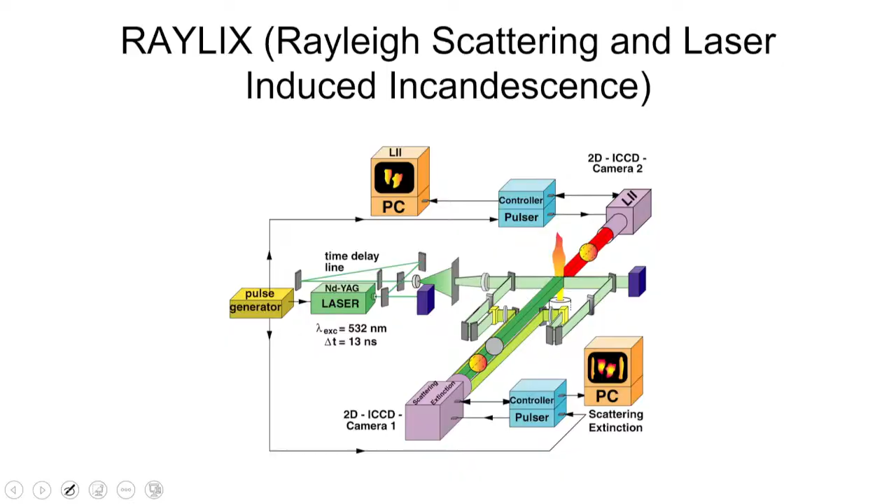So we can get quantitative information about the amount of soot here, together again with the fluorescence of PAH, to examine the soot formation process in detail. This we can also mix with Rayleigh scattering, so-called RAYLIX.

So you can see now the setup is already getting quite complex. First of all, we have again a neodymium YAG laser here. Then we produce a train of laser sheets here to use the whole energy range of our lasers. So we extend the temporal length of the laser, decrease the energy per time, but the total amount of energy stays the same.

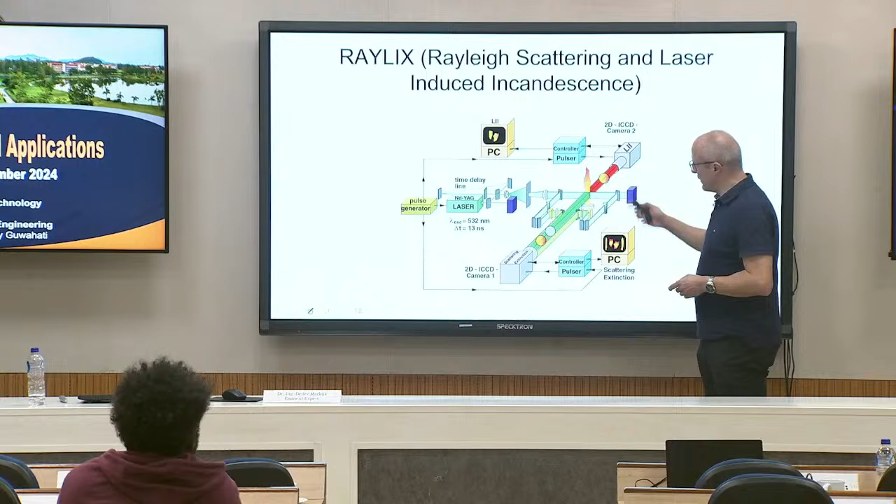And so we can then examine the incandescence with one camera and the scattered light with another camera, using proper filter systems. We get several pieces of information within one experiment. Here we can use this for temporal resolution, since it's a quite fast process.

So I continue with gas chromatography and mass spectrometry as a final part for today. We won't have a break, but I think maybe we need a maximum 30 more minutes, plus the questions and discussion afterwards. Most of this lecture you have survived already, so the rest is maybe also handleable. So gas chromatography, or mass spectrometry. We leave now laser diagnostics.

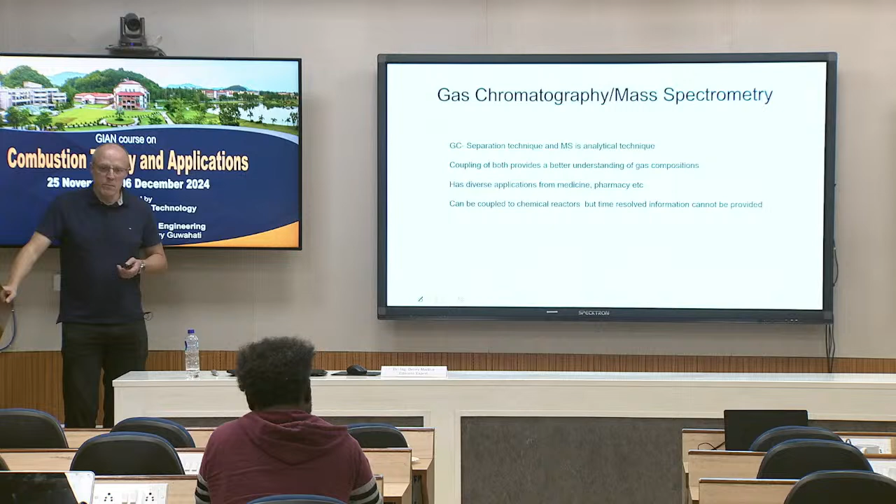Of course it has some disadvantages, so we have to catch our probe. If we, for example, want to extract some molecules from our gas phase and send it to a gas chromatograph, it will cool down, some reactions will continue, so the mixture at the end of the gas chromatograph is maybe not the same we extracted from our gas, our flame. And we don't have any time-resolved information directly, so we have to repeat the measurement very often at different times, for example.

Within this column, the different molecules we inject need different times until they reach the detector. So simply speaking, the lighter molecules are faster here than the heavier ones, but of course it depends on the column we use. But nevertheless, at the end, we want to separate our molecules using this column. And this can be done also for complex systems.

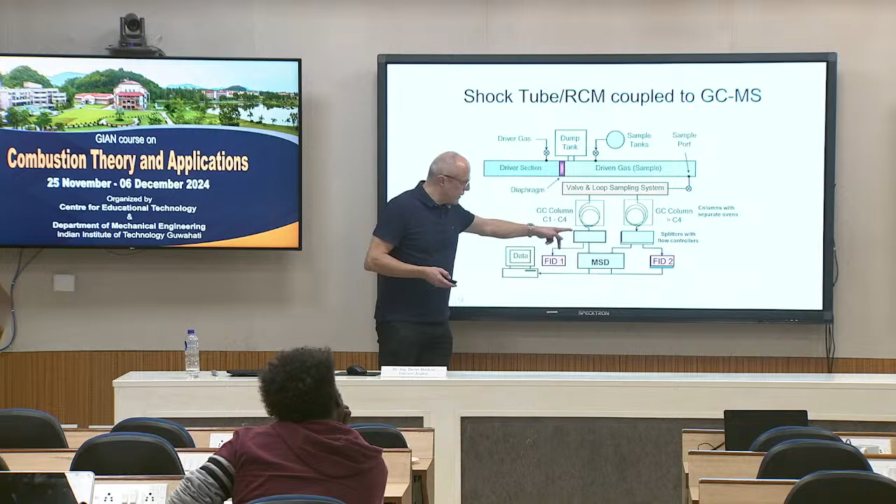Here we again have a shock tube. Here we have a sample port in our region of interest. And here we use two different columns, one for lighter hydrocarbons, one for heavier hydrocarbons. So we get quite sophisticated information here, and this is then coupled to flame ionization detectors.

So we can then not only separate the molecules by the GC, using this FID we can also determine the amount of molecules we have. So we have quantitative information about how much molecules we have and what different molecules we have. So it's quite a helpful method.

And this is one of the advantages if we have a proper reactor: this can be automatic. So this can be done several times in repetition, and we yield a lot of information here. Of course, this depends then on our reactor.

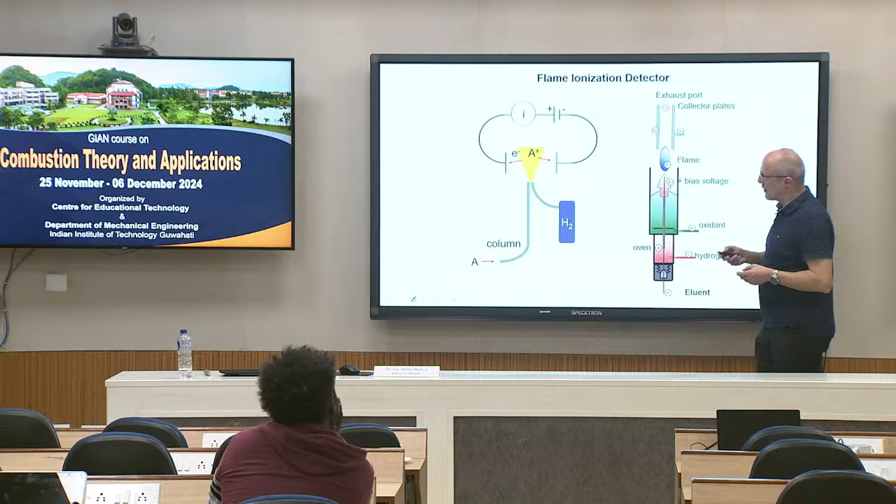So we have an electric field here, and depending on the combustible, depending on the molecules we have here in this flame, we see a different response of the ions here in this flame, and so we can then finally collect or get information about what molecules we have and in what quantity. So what we get from the column, and the intensity then of the response of the amount of ionization, gives us information on how much of each molecule we have.

The idea is: we have a reactor, our reaction takes place here, and we suck out some probe volume out of the reactor, put it into our mass spectrometer. We ionize our molecules, and depending on the mass of the species, these ionized molecules flow through an electrical field, and they will be detected at different positions depending on their mass. We have a 2D time- and position-sensitive detector, and then we can separate the molecules by mass.

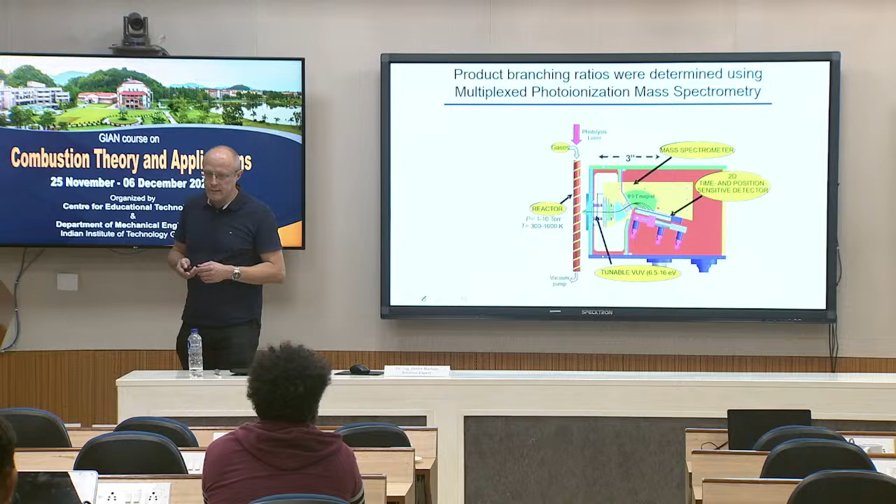So it's quite easy, but we have to consider: we suck out some molecules here, and we need some time until they reach the detector. However, the advantage is we have nearly vacuum inside this cell, so the probability that the excited or intermediate species will collide again and further reaction will take place is quite low.

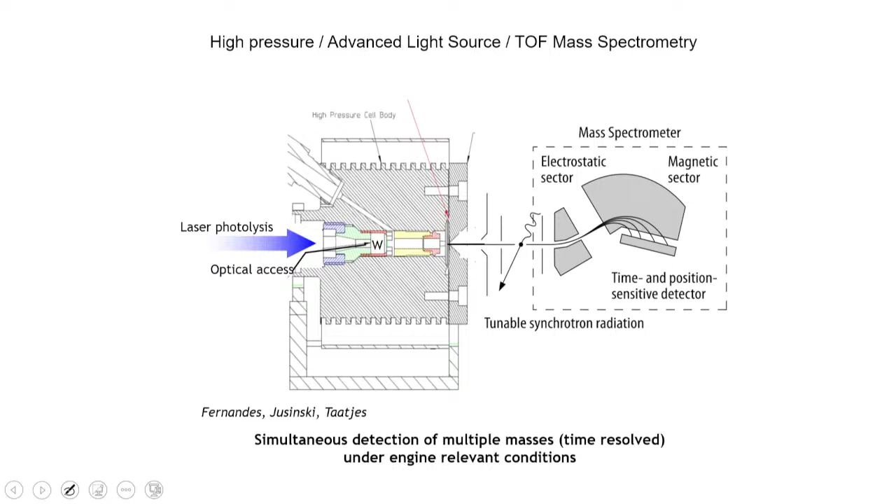If we use a proper setup, we can really get the information we want about the reaction of interest. Here's an example: they used the Advanced Light Source in Berkeley, combined with mass spectrometry. So even very sophisticated measurements are possible, for simultaneous detection of multiple masses under engine-relevant conditions. It's a very helpful technique to get detailed information.

We get additional information when we also consider the time of flight—how long these molecules need until they reach their final destination.

I'll come to an end with the last topic: flow visualization, particle image velocimetry.